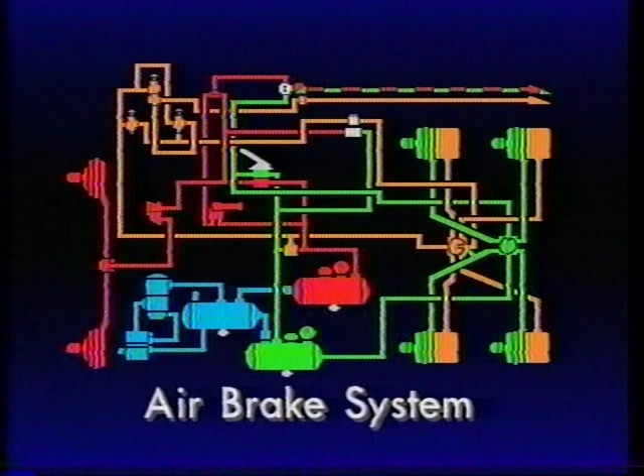No matter what your business is, whether it's hauling materials on high-speed interstates, navigating busy city expressways, or transporting the most valuable cargo of all, people, on crowded city streets, it is your equipment that you rely on to get the job done effectively and safely. It's hard to imagine a more vital part of safe, reliable operation than the air brake systems, and that's what this presentation is all about.

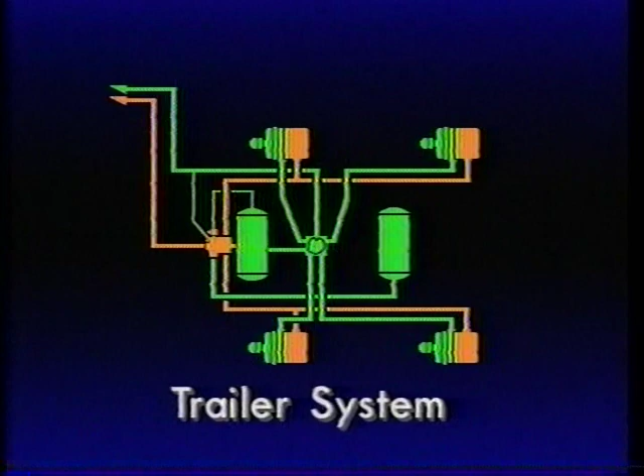A typical air brake system can be divided into several distinct parts: the supply system, the front and rear service systems, and finally, the trailer. This presentation is the first of a four-part series and deals with the operation and maintenance of the air supply system. During the program, we'll point out areas of maintenance concern.

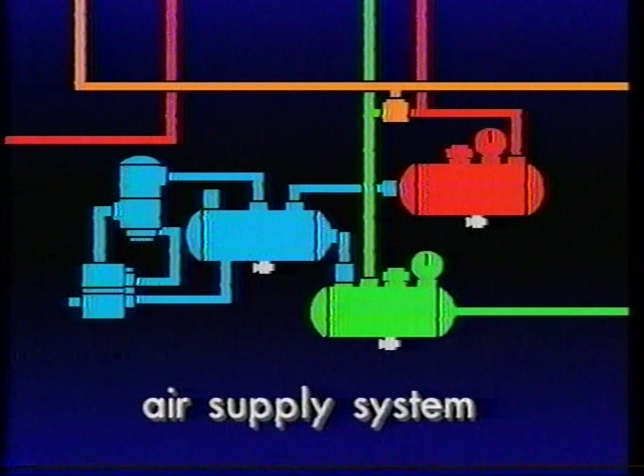Although brake systems and components may vary from vehicle to vehicle, the air supply system, shown here in blue, is basic to all. The major components are the air compressor, supply, front axle, and rear axle service reservoirs, governor, and air dryer.

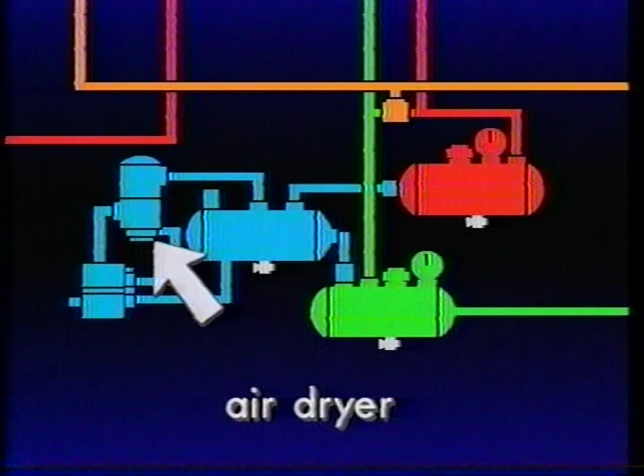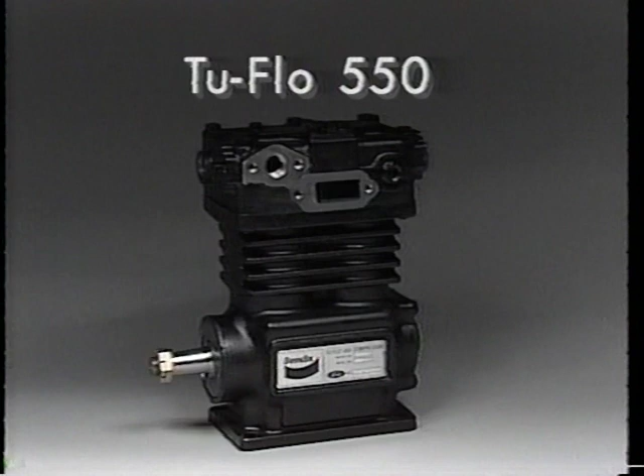The primary component of the supply circuit is an air compressor, such as this Bendix Tu-Flo 550. Powered by the vehicle's engine, the air compressor converts atmospheric air into compressed air, energy needed to power the vehicle's brakes. The compressor components we focus on during this presentation are the crankshaft, connecting rods...

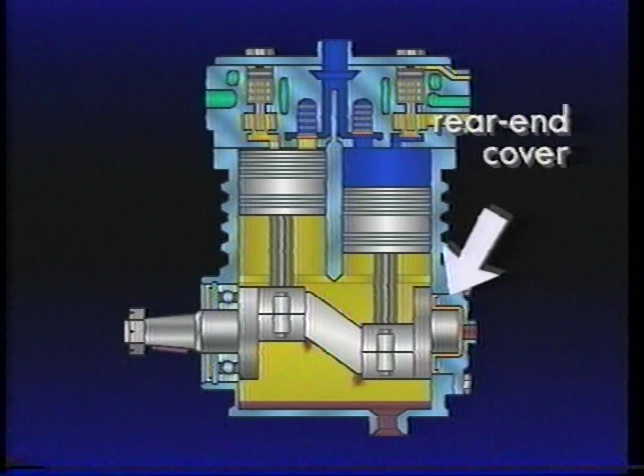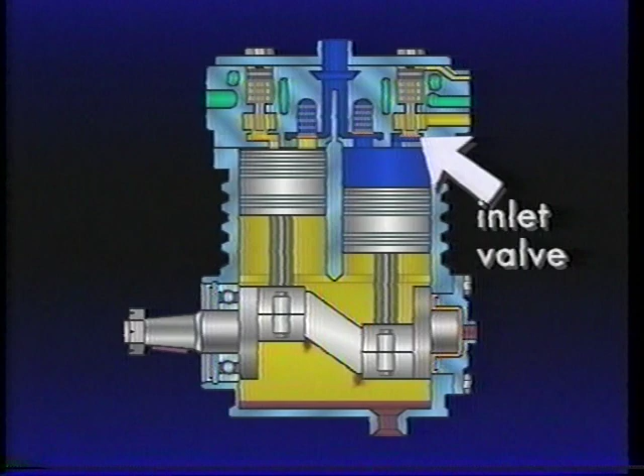...rear end cover, rear main bearing journal, pistons, cylinder bore, inlet valve, discharge valve, and discharge port.

The compressor crankshaft and connecting rods convert the rotational force of the engine to a vertical linear force in the compressor pistons. The compressor is lubricated by pressurized engine oil, which in this case enters the rear end cover, flows to the rear main bearing journal, and through a passage in the crankshaft to the connecting rod bearings. Oil that escapes from around the bearings falls to the bottom of the crankcase and is returned to the engine. This oil return is important because it prevents crankcase flooding, which results in compressor oil passing.

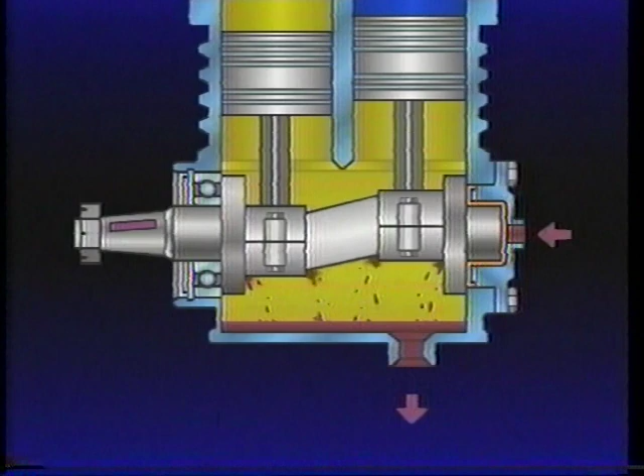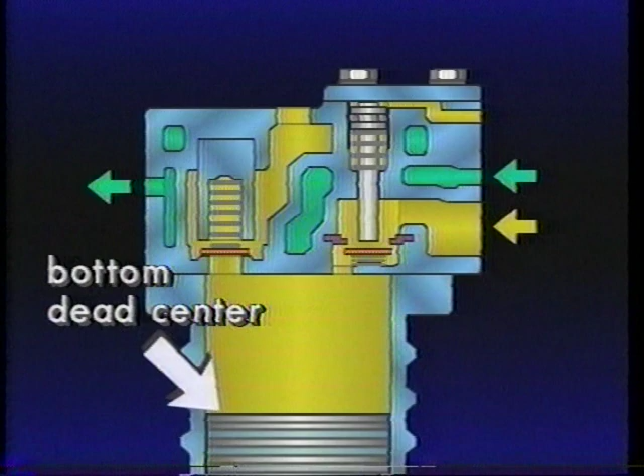Let's take a look at the air compressor from a front view, revealing a single piston only. During the intake stroke, a slight vacuum is created above the piston in the cylinder bore, causing the inlet valve to open and move from its seat. Filtered atmospheric air flows into the bore until the piston reaches bottom dead center and begins to reverse its travel.

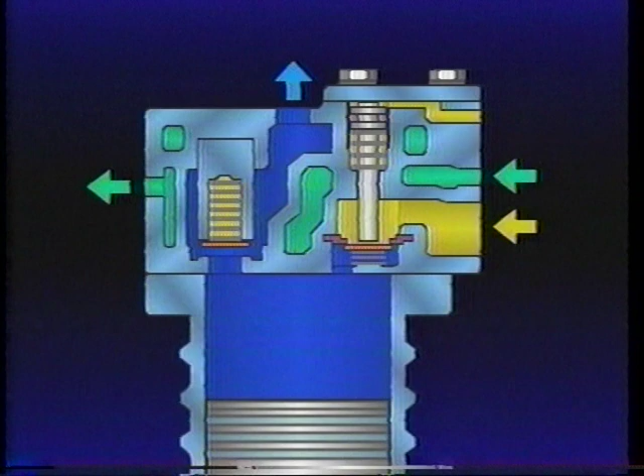As the piston begins its compression stroke, the inlet valve closes, and the air in the cylinder bore is compressed as the piston approaches top dead center. During air compression, the discharge valve opens, allowing compressed air to flow from the cylinder bore past the open valve and out the discharge port into the supply reservoir.

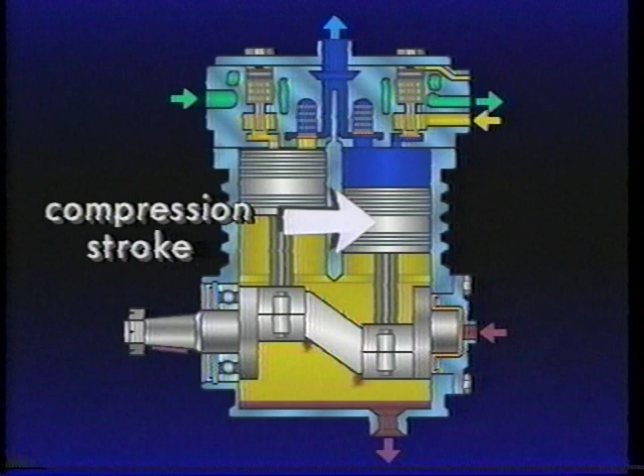Returning to our full cutaway view of the compressor, we find that since the compressor contains two cylinders and the crankshaft has 180-degree opposed journals, one piston will be on its intake stroke while the other is compressing, building to maximum pressure. While this is occurring, a constant flow of engine coolant is routed through the cylinder head cavities to dissipate the heat generated by the compressor during air compression.

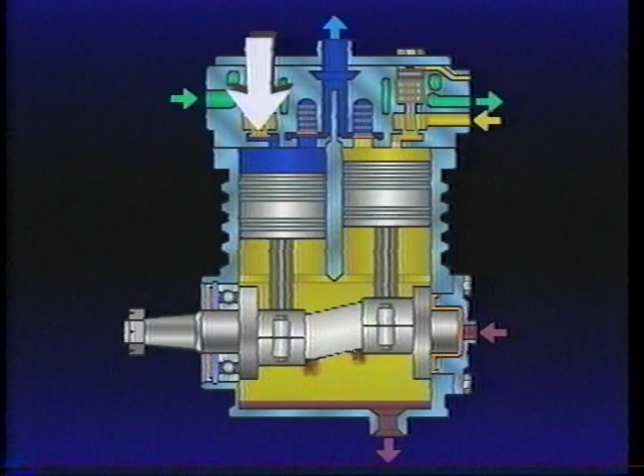Rapid buildup of air pressure depends upon proper opening, closing, and sealing of both the inlet and discharge valving and unobstructed flow of air in the cylinder bores.

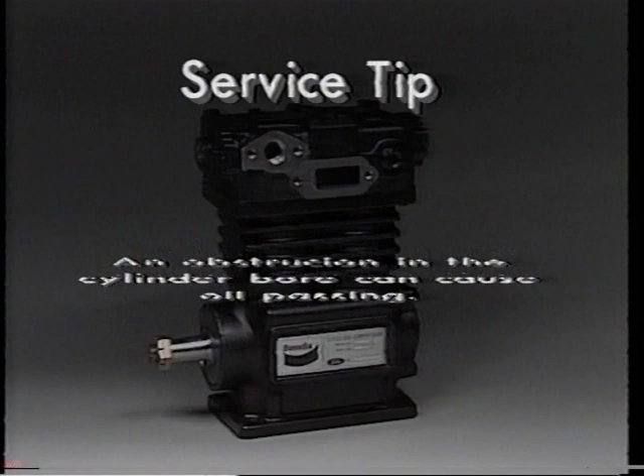Check for any restrictions to the flow of atmospheric air into the cylinder bore or the compressor discharge line leading to the supply reservoir. The obstruction of atmospheric airflow into the cylinder bore will cause the vacuum above the piston to draw oil past the piston rings, resulting in oil passing.

An obstruction in the compressor discharge line leading to the supply reservoir will cause the compressor to run hot, build carbon deposits, and pass oil despite adequate coolant flow.

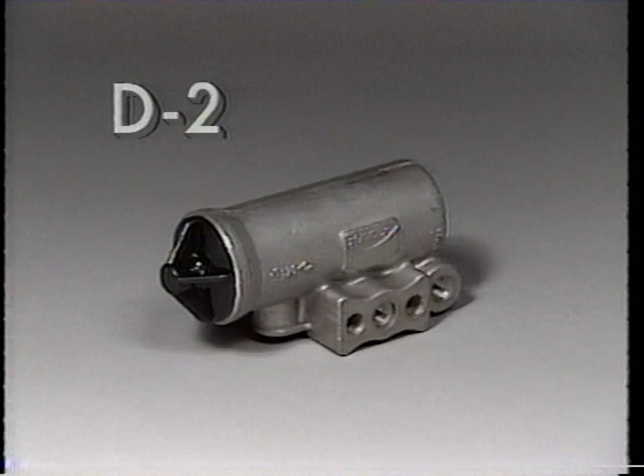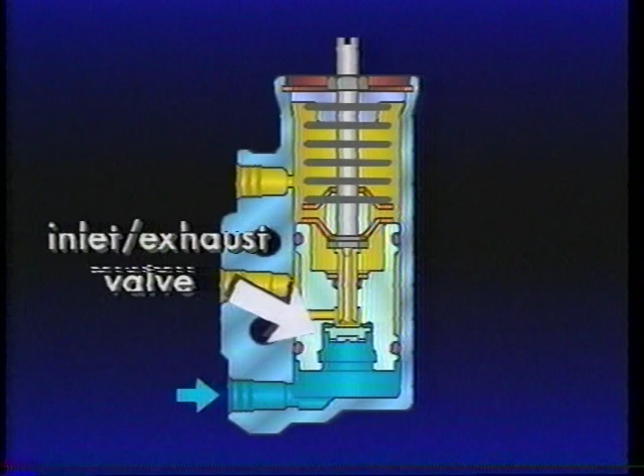Next, let's look at the Bendix D2 governor and how it interacts with the compressor and supply reservoir and later the air dryer. The governor is used to control the compressor and thereby regulate air pressure in the supply reservoir. The governor's main components are the reservoir port, piston, inlet exhaust valve, pressure setting spring, and governor unloading port.

An air line connects the governor to the supply reservoir. Reservoir air enters the governor at its reservoir port. As air from the compressor builds reservoir pressure, the governor's piston and valve move together against the resistance of the pressure setting spring. When reservoir pressure reaches the cutout setting of the governor, typically 120 psi, the piston will have moved sufficiently to seal the exhaust and open the inlet.

Reservoir pressure flows past the inlet, through a passage in the piston, and out the governor unloader port to the compressor unloader mechanism. Air from the governor enters the compressor and acts upon the unloader pistons, which move and hold the compressor inlet valves off their seats.

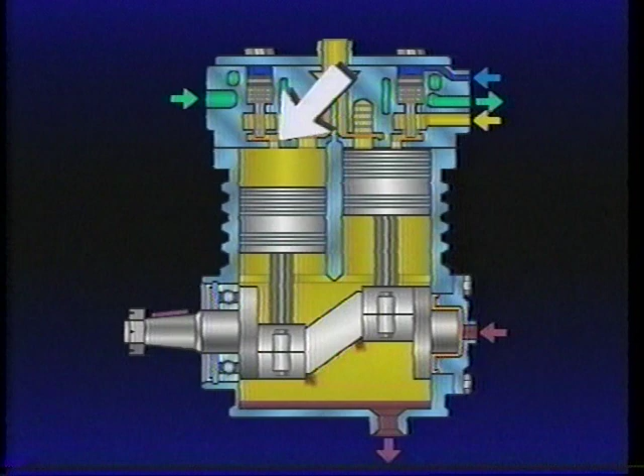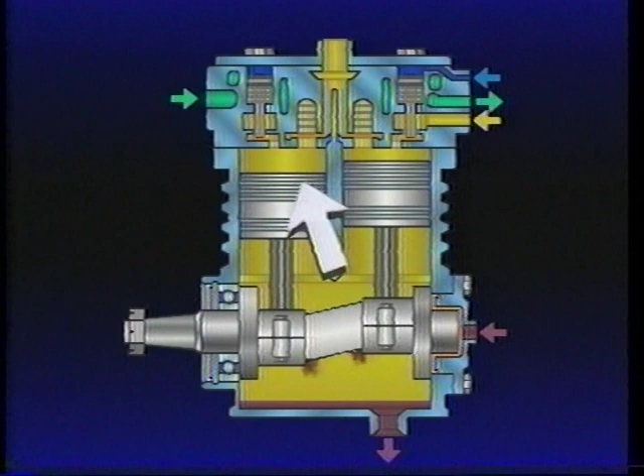With the compressor unloaders pressurized, air enters and leaves the cylinder bores through the open inlets, and air compression ceases. Because the pistons are 180 degrees opposed, air is shuttled from one cylinder to the other as the pistons move up and down.

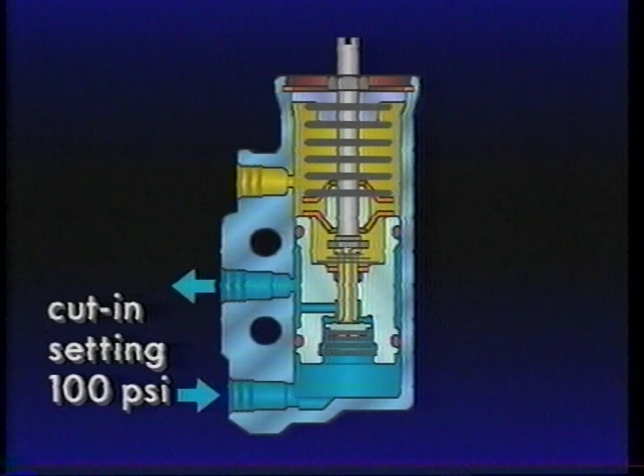When supply reservoir pressure drops to the cut-in pressure of the governor, typically 100 psi, the governor pressure setting spring moves the piston, closing the inlet and opening the exhaust.

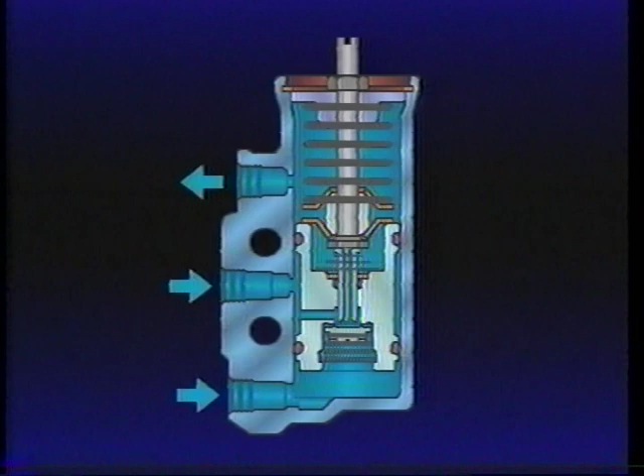Air in the compressor unloader mechanism flows back to the governor and is exhausted. With air pressure removed, springs move the unloader pistons, allowing the inlet valves to return to their seats, and the compression of air resumes.

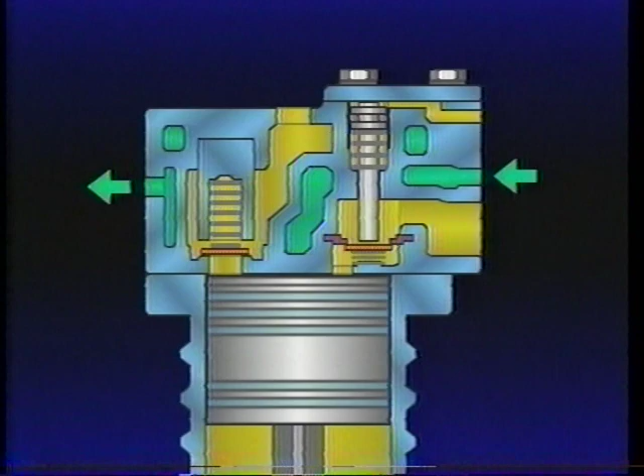Here's a service tip. Make sure the air line between the supply reservoir and governor is unrestricted. Otherwise, the governor's function will be impaired. If either the governor or compressor unloader mechanism fail to function, the compressor would continue to compress air.

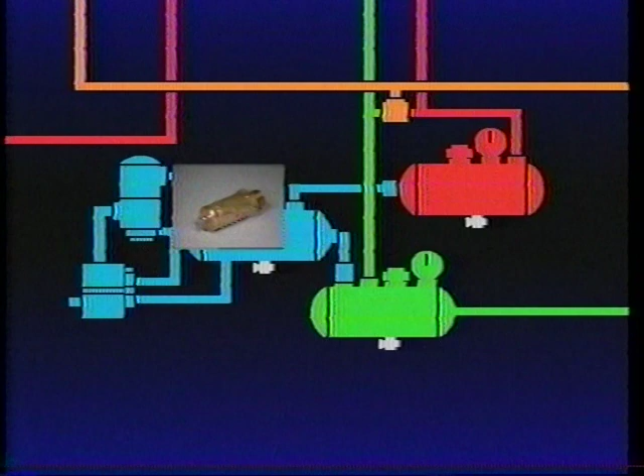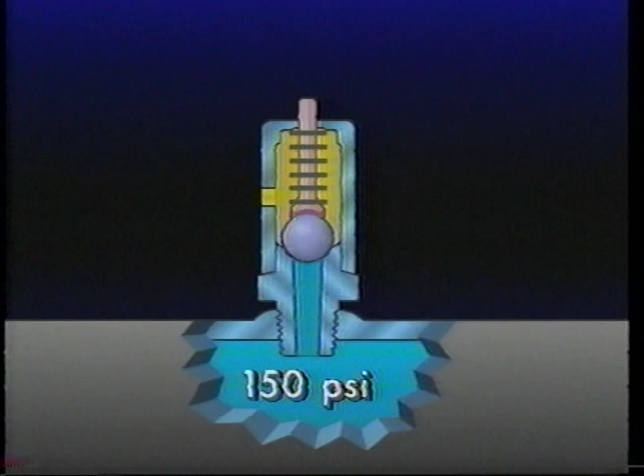To protect the air systems against a failure of either the governor or compressor unloader mechanism, a safety valve like the Bendix ST3 is installed on the supply reservoir or air dryer if the vehicle is so equipped. Generally set to open at 150 psi, the safety valve employs a spring-loaded stem resting on a seated ball valve.

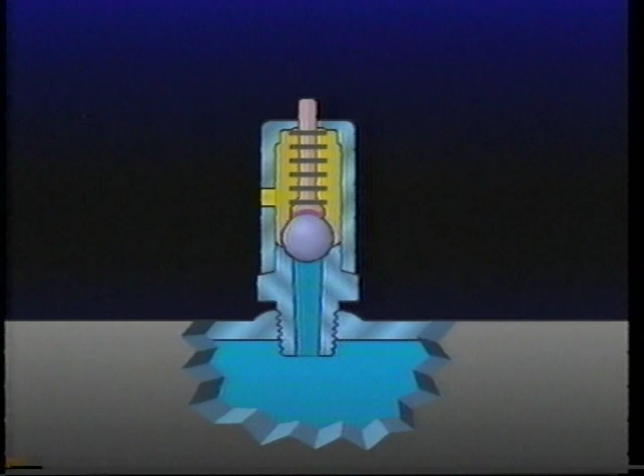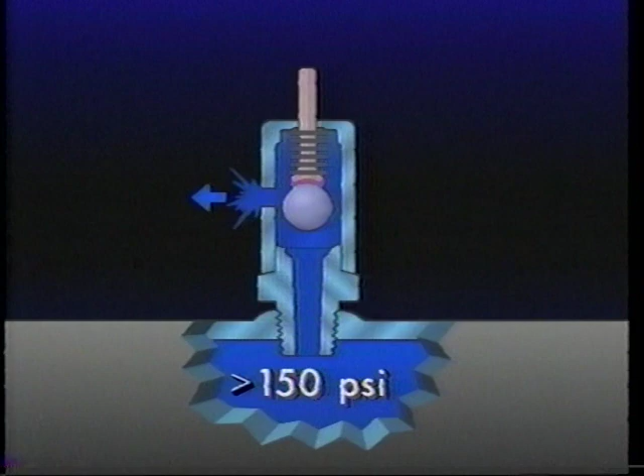When reservoir pressure exceeds the valve setting of 150 psi, the ball moves off its seat and air is exhausted through the exhaust port. The safety valve should be checked periodically by pulling the exposed stem. Air should escape when the stem is pulled and cease when released.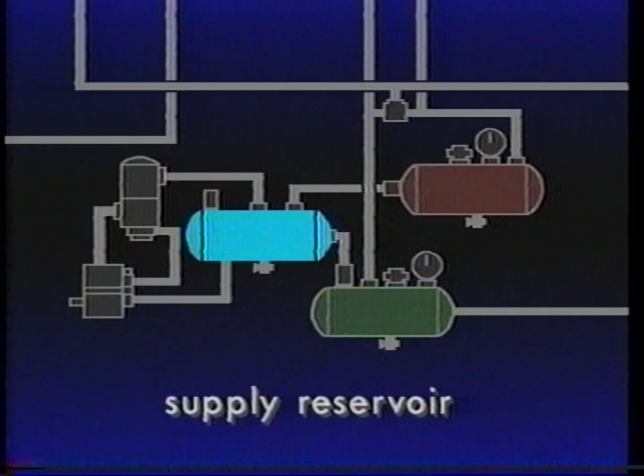A dual circuit brake system generally consists of a minimum of 3 reservoirs: the supply reservoir, the front axle service reservoir, and the rear axle service reservoir. The service reservoirs supply both the front and rear axle brake circuits. Air from the supply reservoir flows through single check valves.